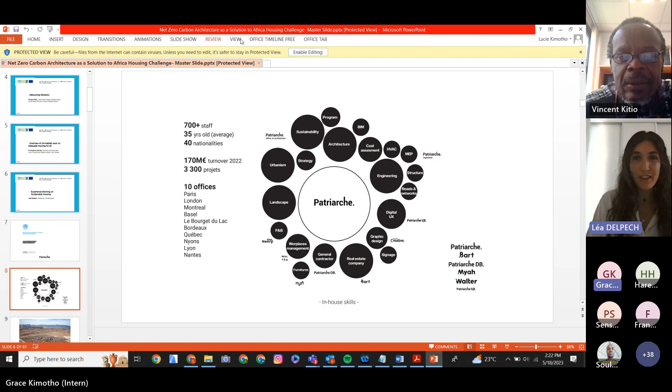So first we can present ourselves. I don't have the hand on the presentation. I don't know, or you want to share yours? I cannot do it myself right now. Grace, can you just, either you change it, or... I don't know how to do that. Okay, I can share your slides here. Okay, no problem, and I can just tell you when to change.

Thank you. So just to present ourselves: Patriarche is a family name, a family business for like 4 generations. We have Damien Patriarche today as general director, and we work through what we call augmented architecture, with very multidisciplinary skills within the office. The idea is to reconsider the whole building environment, having all the professionals within the office and making the best of each other to provide the best building possible. We have today 700 people in the office, divided into 10 different offices. Half are in France, and we have 2 offices in Canada, 2 in Switzerland, and 1 in London.

We have all kinds of professions within the office, going from engineering to architecture, also working on the real estate part. We have designed some buildings that we also manage today as workplace management, and this makes us able to change the way of using the building and provide new solutions.

Talking today about sustainable architecture, we have to consider that we're going to talk about architecture, so we'll not talk about the urban scale, but we always have to keep it in mind. About urban planning, there are the UN Habitat goals, good to always keep in mind when talking about the urban scale, on well-planned cities that are well governed and efficient. When we talk about the location of cities, sometimes we see development going a bit out of town, with satellite cities or this kind of thing. So these are all crucial things to consider for growing and building cities.

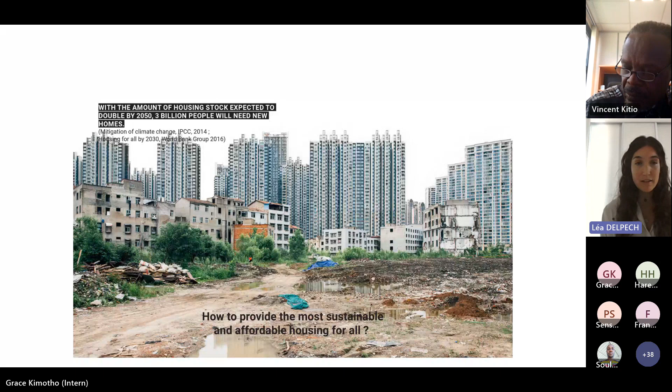So we talk here about the mass, the huge quantity of housing to provide, because we know that in the very near future, around 2050, we have more than 3 billion people to provide housing for. So we're talking about a huge mass and great emergency, because we have to provide very rapid solutions, all while reconsidering affordability. The question we ask ourselves today is: which sustainable and affordable building can we provide to answer these three needs of quantity, rapidity, and affordability?

When we talk about sustainability, of course we're going to talk about energy and the conception of the building. The more efficient the building, the less energy we need, but it also depends on the users—we really believe in a user-centric approach. It's only when energy needs go down and building efficiency goes up that we can provide a sustainable building. So it's a leverage of these two topics to work on to provide sustainable building.

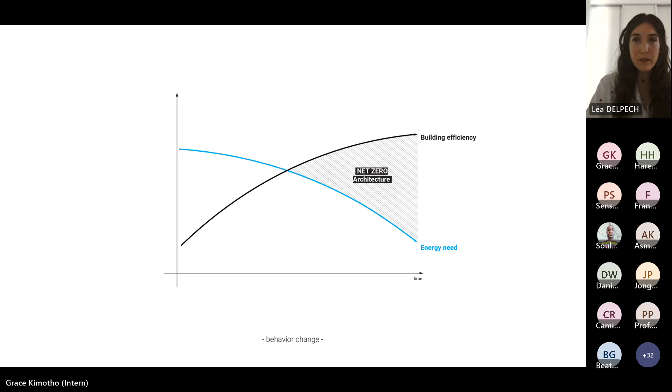So when we talk about sustainable building, if we talk about the African Housing Challenge, we cannot avoid talking about affordability. Here we consider two ways: there is a low-income class and this huge informal economy including a billion people, and another part, the middle and upper class. For the middle and upper class, we talk more about modifying the image of contemporary architecture and people's expectations in the production of housing, so it's about modifying the way we already produce housing. For the low-income class, it's more about providing a new way of conception that answers the urgent need for mass-productive affordable housing.

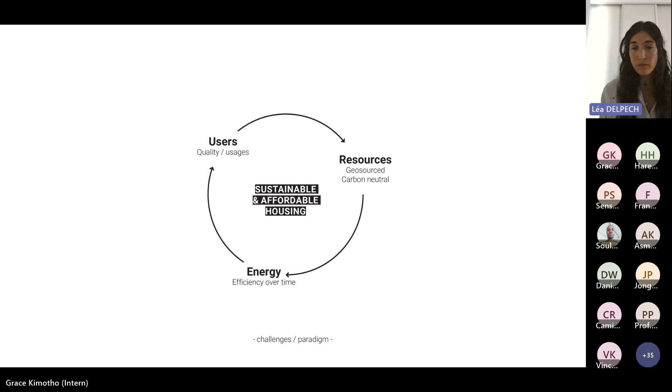So these are two ways of working with the same goals, talking about sustainability. As I mentioned, we include affordability and also livability, considering the users within the process of making architecture. From these points we get three large topics: the user-centric approach, providing quality of living and considering energy consumption within the building, and thinking of the long-term use of the building with the users' evolution within it. And of course, the resources, providing geo or bio materials within the building, always trying to lower the carbon impact of construction, and providing new schemas for large-scale, fast prefab creation.

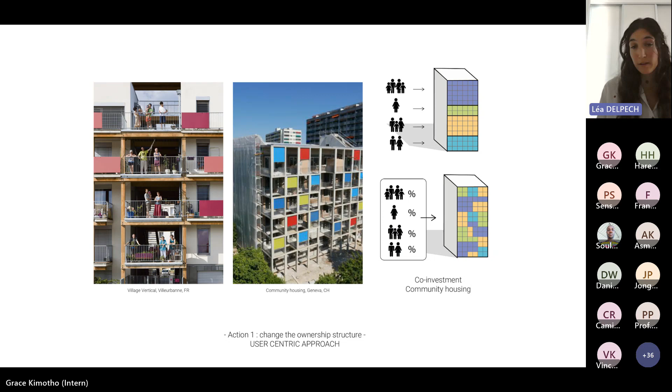Another approach is to consider adaptability within the architecture with a capable volume, for example, where an owner buys a volume that can adapt to his way of living in the future. So if we have a high volume, we can add a mezzanine or even add rooms depending on the people living there, depending on the moment of life, etc. So it's within the module that we have the evolution, and this also brings lower costs for the evolution of the building and retrofitting. So this is the approach on the volume.

Here we have the same approach but more on the floor plan, depending on the use of the house during the moment of the day, for example, thinking of a more movable way of using the house during the day. So we consider it long-term on the volume, and maybe more about daily life on the floor plan. All this brings new approaches to living that can offer new solutions.

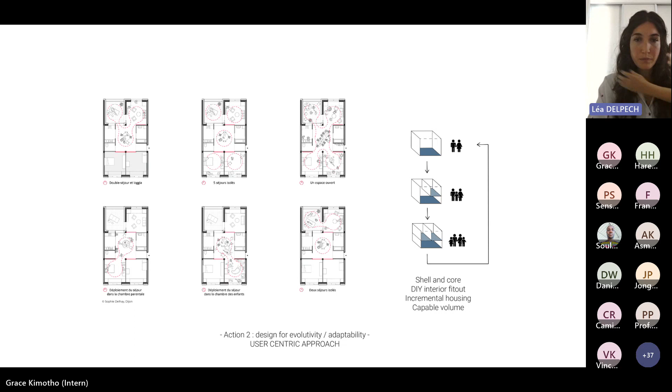Sorry for that. It's a holiday today in France, so we are all home with Thibaut and there can be kids around. I'm sorry, Léo.

So here's a project with bio and geo sourced materials that we developed in Togo a few years ago - this is a kind of good example we made. We have worked more than 20 years in Africa up to now, and in this project we used some very interesting processes to make the building. For example, we used the soil from the ground to make round bricks for the building, with a training process for the people who worked on it, providing them a profession they could use afterward to build other village buildings. The building was very large in scale, so we built a machine to make the bricks. This is the right approach to resources for making buildings.

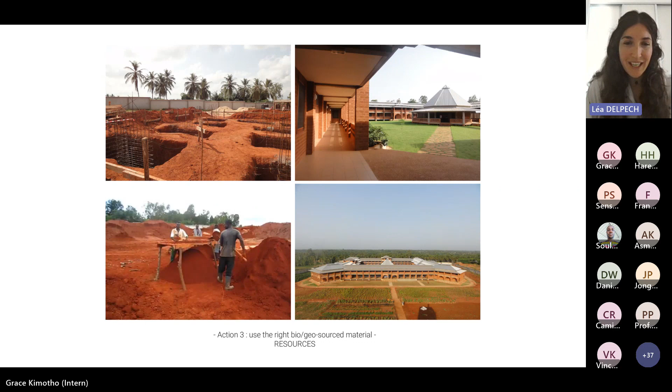We can go ahead. Here's another project where, considering the resources, it's about mixing the materials and finding the most affordable solution by mixing the materials and using the best of each for cutting the cost and bringing the best structure for each material. We can find some mixing of materials in the structure, etc.

We have made some other projects with, for example, this one where we used some prefabrication solutions. This was a project of a shelter for homeless, where we made the modules off-site and brought them with a crane onto the site. We had a structure considering the building, the modules to put in. So it's a way of prefabrication, and we are reconsidering it also in some other way, maybe on the facade solutions that might be more affordable for some other places.

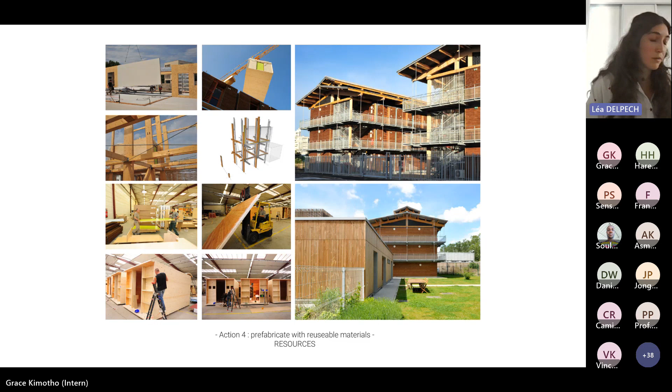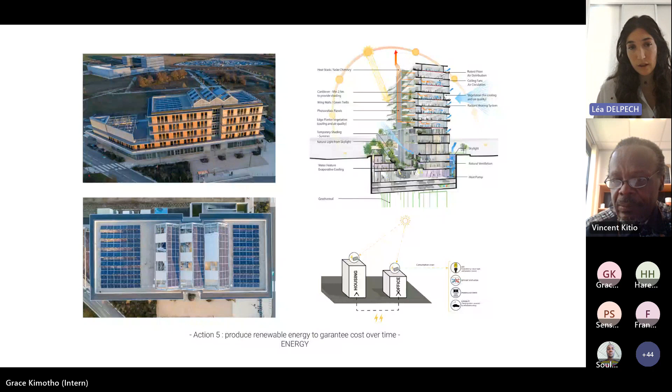Talking about energy for sustainable and affordable housing, we consider that the more we go off-grid, the more we can be efficient. For example, if we consider energy as a service within the building and include it from the conception of the building, we can provide the energy through the building. If we consider the whole chain from the beginning, even exchanging depending on the use of the building—like this drawing shows, going from housing to offices depending on the use—using the energy when we need it and providing it on our sites can also cut the cost for the users and for the people who live in.

This is not always easy to make, because for example the retrofitting takes a lot of money and effort, and sometimes bringing the users out of the building, etc. So this is not always too easy to implement, and this is the barrier we are watching today, with buildings which end up with no retrofitting, etc.

So our thoughts are to reconsider all this diagram and to make it leaner by dividing the cost on each step. So we can go on to the other one, please.

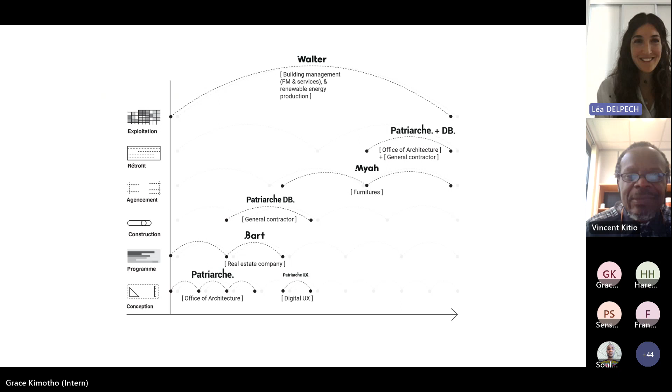You mentioned the fact that we should not just focus on providing housing for the low income section of society, but should also look into the middle and high income groups. This is very important, as you put in the presentation, talking about the fact that the user should always be the person we need to have in mind as we design, plan, and build houses for them. You also mentioned the issue related to densities, which is very important and needs to be taken into consideration as well.

If we think about the fact that urbanization is growing rapidly, and I like those pictures showing the sprawl. If we have to deliver houses just focusing on quantity, we might also damage the environment in the process. And when you were talking about affordability, one way is also to look into incrementality, that we give a space to the user, and then they can gradually improve on that space.

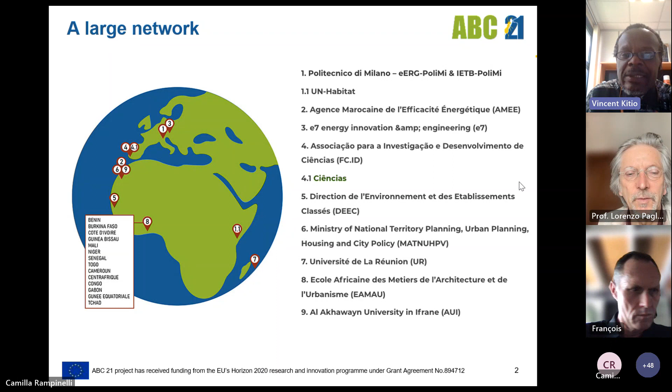Okay, so again, there are a number of reports that you will find on the website dealing with local materials and construction practices, case studies - Francois Garde will talk about that. Weather files for future climate, because we have to design for the future. Obviously we are designing now for the rest of the century and building now for the rest of the century. And an update of technical guidelines which exist in many forms - there is a review of existing books and good guidelines produced in the past, and some updates due to the new conditions. Let's go to the next slide.

There is also a lot of new advances - sorry, not too much, stop here. So there's been a lot of work to update and make more precise the energy assessment indicators and the comfort assessment indicators. I will focus on a few key elements of this, and in particular on the net zero energy over a year concept and its problems and possible solutions for those problems.

So the key indicator that we identify in the project, and is identified as a key indicator in the standards, is the energy need for heating or the energy need for cooling, which is the heat to be delivered to the space to be conditioned to maintain the intended space temperature conditions or comfort conditions for a certain time.

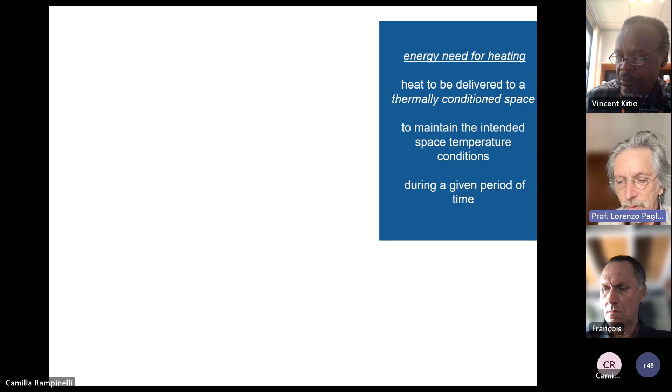This has to do only with the features of the building per se, of the building envelope and of the ventilation. It's independent of how we then produce and deliver energy to the building. It's how much the building uses per se for its geometric and physical features.

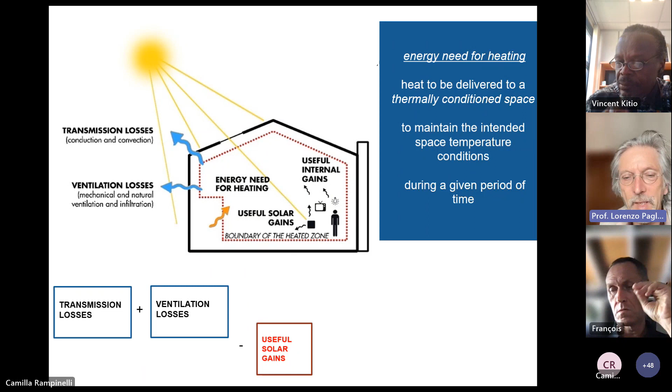If we go on, step by step in winter there are losses due to transmission through the envelope and losses through ventilation. We are sending out warm air and bringing in cold air. These are losses which can be compensated by free gains.

The solar gains and the gains generated by people and appliances inside - the difference between losses and free gains is what still needs to be given to the thermal zone to keep it at a given temperature. This is called energy need for heating, and it's physically defined in a univocal way, it can be calculated.

This is calculated generally in every labeling, because it's the first step for the calculation. Differently from this, delivered energy is the energy given to the larger boundary, which includes the building and the plants - it might be gas or electricity coming at the meter that we see here.

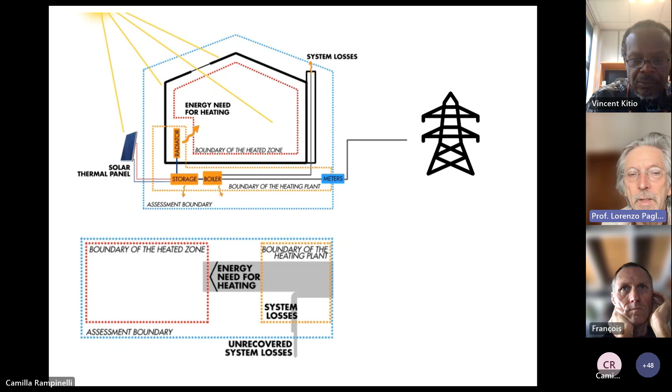If we go one step further, we see the delivered energy, which is the sum of the energy need plus the losses of the system. This delivered energy can come from local generation, a solar panel on the roof, or from the grid.

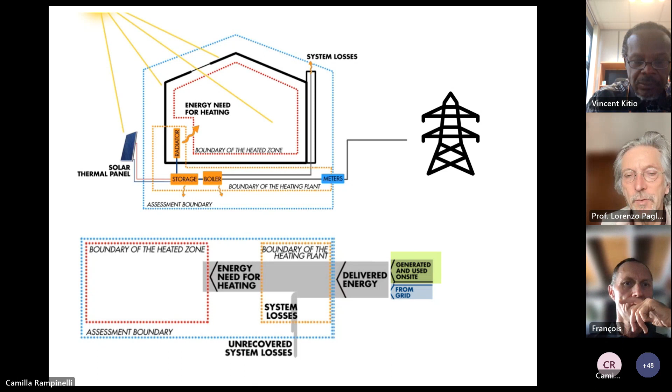If we go on, we can calculate to compare the various sources, renewable and non-renewable. We invented these primary energy factors, which take into account the losses between the point of delivery and the source. For example, gas - we extract it from a gas region, then we have to transport it, and unfortunately we lose some of it during the travel, and we have to pump the gas to proceed along the pipes, so we have energy losses which are taken into account in these primary energy factors.

When we consider all the flows coming to the building, both fossil and renewable, we multiply each flow by the primary energy factor. We call the sum of all these flows multiplied by the primary energy factor total primary energy.

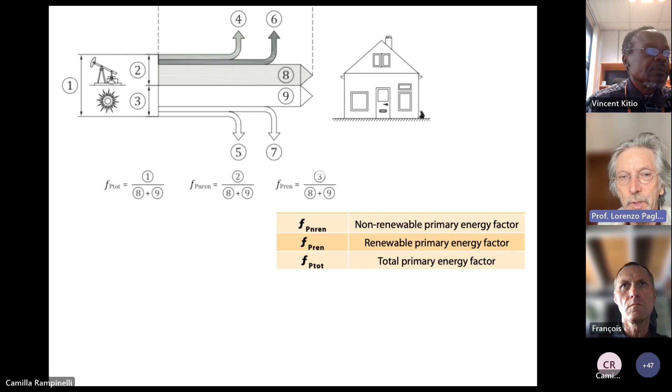If we consider only the non-renewable flows, one step forward, then we talk of non-renewable primary energy, because we consider only the non-renewable flows, the fossil for example. So we have these various indicators: energy needs, delivered energy, total primary, non-renewable primary.

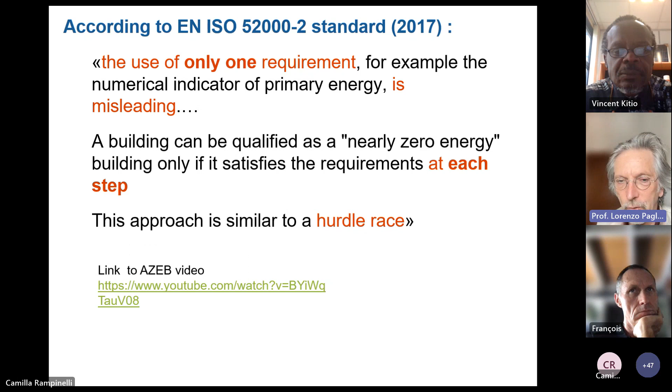The standard - sometimes in the labeling only one indicator is used, primary energy, sometimes not even saying which primary energy - and the standard clearly tells us that this is misleading. To really qualify a building as nearly zero energy, we should fulfill various steps. It's a sort of hurdle race with three steps to be followed. There's a video that you can watch where these things are described.

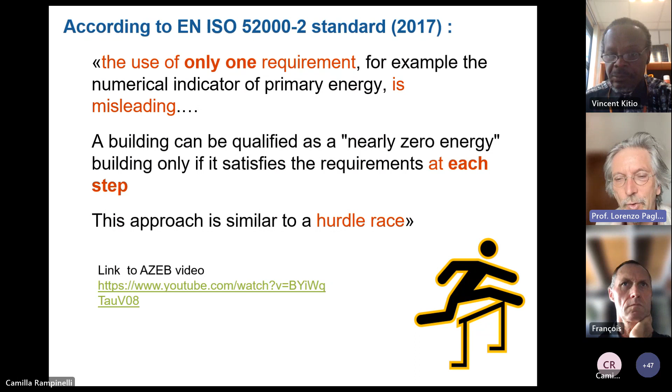These steps are: calculating and reducing the energy needs for heating and cooling, which have to do with the performance of the building envelope, its geometry, its heat recovery and ventilation. This is the largest step.

We have retrofits in Milano where we went from 150, 200 kilowatt hours per square meter per year energy needs to 20 - so we went down by 80, 90%. This is true also for new buildings, which can be done to a target of 15, 25 kilowatt hours per square meter per year.

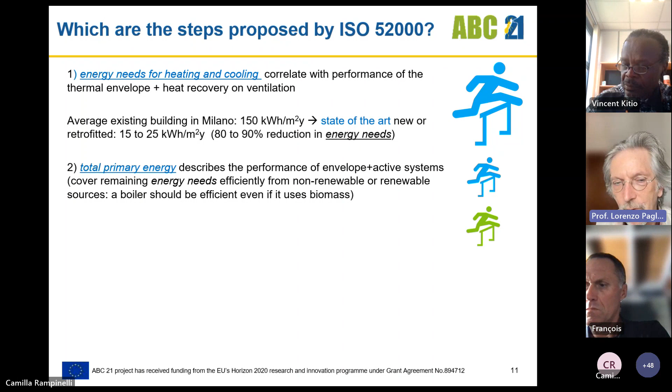Then we can reduce total primary energy by having efficient active systems to generate and transform energy to fulfill the energy needs. The last step is, within this generation, to choose generation from renewables, in such a way to reduce the non-renewable primary energy.

So the energy efficiency first principle, in fact, means lowering the indicators energy needs and total primary energy. As we see in many of the case studies that we've shown and will see later, the first step is the largest one, where we have more possibility for impact, going from 200 to 20 kilowatt hours per square meter per year energy needs if we design and build the envelope well.

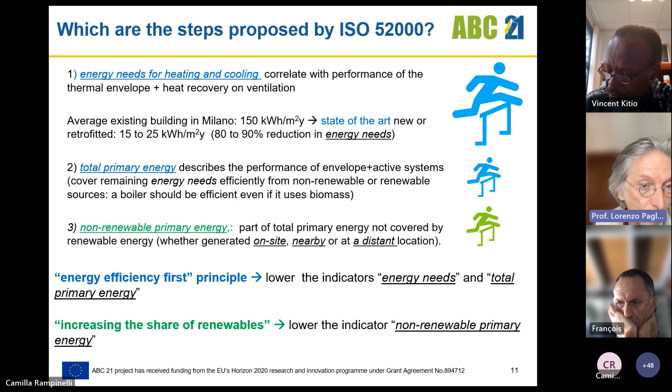And then the small amount of energy remaining should be generated from renewable sources, obviously. The fact that we talk of net zero energy balance, net zero buildings - let's say it's a sort of shortening, but it should include all three steps. If we just concentrate on the last step...

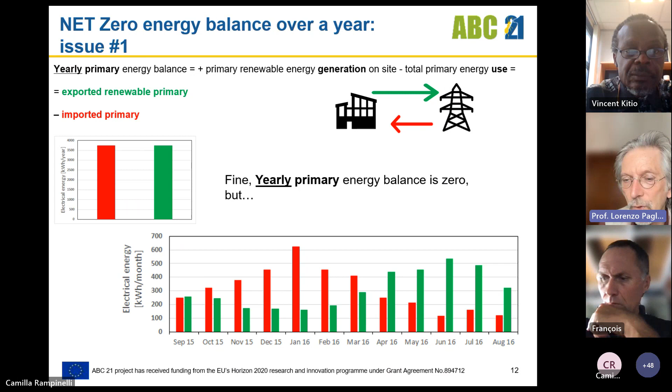The primary energy balance over a year can be calculated in this way: what we export, renewable energy exported to the grid, minus energy imported from the grid over a year. Over a year we might be at zero, so the two quantities might be equal, but month by month this would not be the case. Particularly in Europe, you would generate a lot in summer and use a lot of energy in winter to warm the house, and you will not have a physically zero balance.

Still, gas is burned and CO2 is emitted.

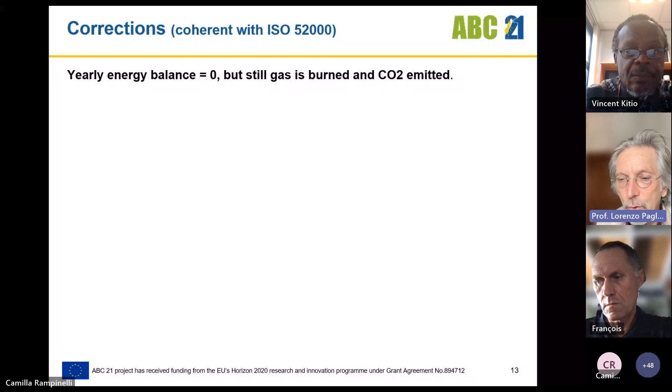In this balance, on paper, you assume that photovoltaic energy is stored in the grid and retrieved in summer and winter without losses. In reality, interseasonal storage costs materials and embodied energy, and incurs losses.

There are possibilities to correct this. For example, in Italy and other countries, the energy balance is calculated per month, not per year. Or the primary energy factors include these losses, as in passive house certification.

But the real physical cure to this problem is to strongly reduce the energy needs. In this way, the imbalance will be low, and the requirement for storage and transmission infrastructure will be low.

I think I can have one more slide.

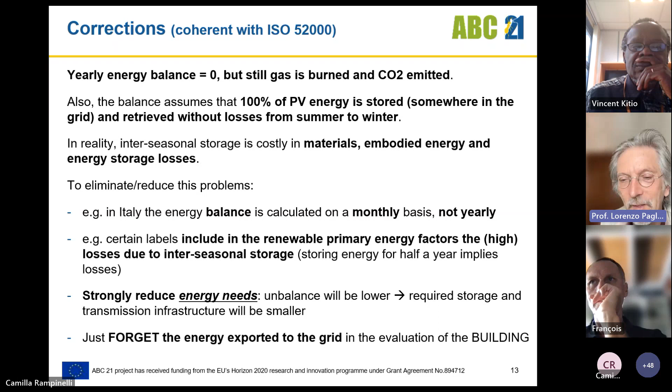In fact, there is a possibility in the standard to not consider the exported energy to the grid as something which improves the performance of the building. This is generation of energy in the energy system, something different from the building. You consider only the renewable energy self-consumed by the building in the qualification of the building.

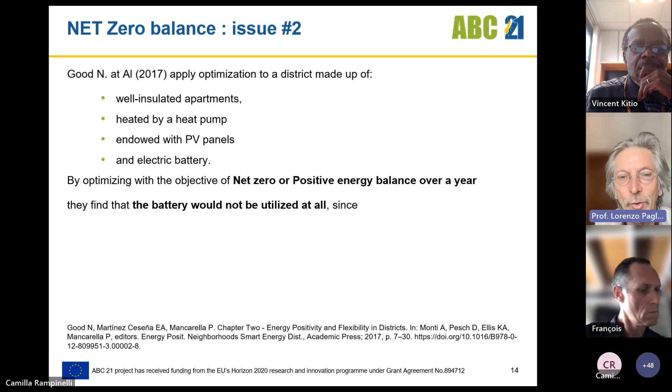Not doing this, and using this virtual balance over a year, means that when you optimize to bring this virtual balance to zero, even if you have local storage, you will not use it, because the virtual storage on the grid has no losses and is much better. So you are pushed to export rather than self-consume, which is obviously not physically reasonable.

So just a warning about this net zero concept and phrasing, which can be used if it's intended as three steps: reduce the energy needs, reduce the total primary energy, and then increase the share of renewable within the total primary energy.

I have also slides on comfort, but I guess Vincent will tell me we have limited time. So I invite you all to go to the website where there is the first webinar on energy and comfort definitions, and you will find in 20 minutes a description of these new indicators for comfort.

Which include, as a key element for summer comfort, air velocity on people. So the use of ceiling fans or natural ventilation to cool down the body via air velocity is now fully included as a key element in summer comfort in the new standards, which was not the case till five years ago. It was there, but just with a minor role.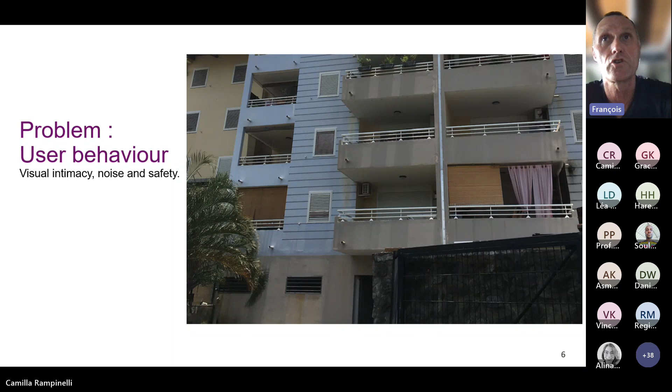We also have problems of intimacy, because architects sometimes don't think about intimacy, noise, and safety. On this slide, you can see that the tenants put up blinds, but the problem is that they completely block the ventilation, which is very useful to avoid air conditioning in our latitudes.

First of all, I'm here not to speak in terms of models. I will speak about rules of thumb, very simple passive solutions that are easy to duplicate.

First of all, the importance of trees. We have to plant trees around the buildings to create a canopy, a natural canopy that allows a kind of microclimate around the building, where the maximum external temperature remains at the top of the trees. The good example is at the top, and the bad example is in the middle of the slide.

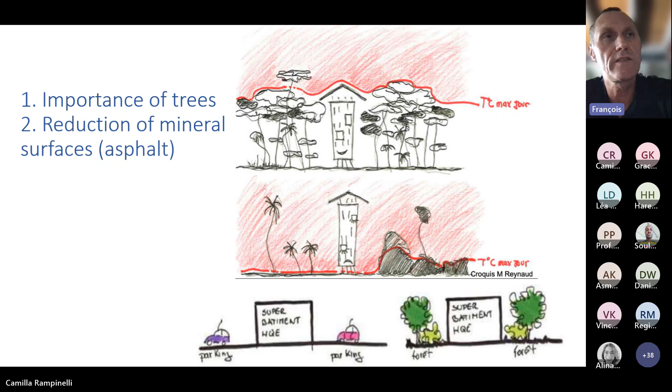The second thing: we have to reduce the mineral surfaces. You have to avoid putting car parks around the buildings. Another simple solution is to plant trees around the buildings and put car parks underneath the buildings. I will present now two case studies.

The importance of ventilation, very simple. We have different uses of ventilation for different things. In Europe, in air-conditioned or heated spaces, we use ventilation just to breathe, so we just have to renew the air, at a rate of 1 air change per hour.

The second use is to evacuate internal loads, but the third one is the most important. It allows us to create an air velocity on the users to minimize the temperature they feel, and we create this air velocity of 1 meter per second by using natural cross ventilation. In terms of air change rate per hour, that represents about 60 air changes per hour. If we can do that, we can feel comfortable at temperatures like 30 to 32 degrees.

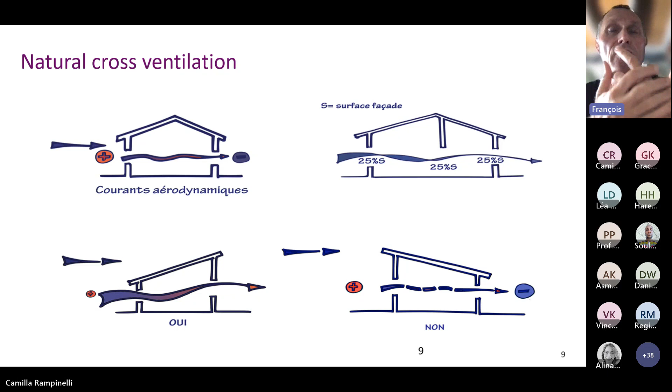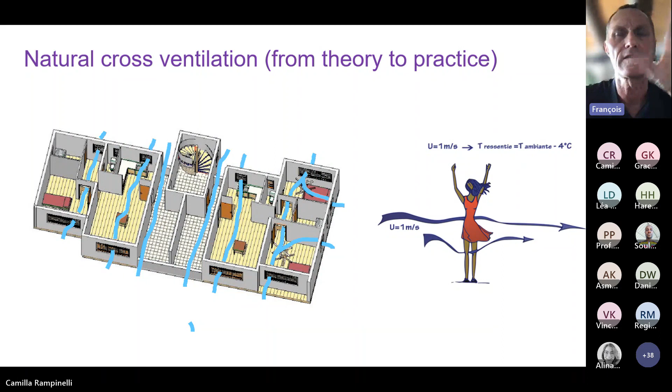Now we come from theory to practice. This is an example of two-bedroom units, and as you can see in the pictures, it's very easy: you have a stairway, and from the stairway you can access 2 dwellings, and all are naturally cross ventilated.

In all social housing dwellings, the installation of ceiling fans is mandatory in the regulations in La Réunion. That means 1 ceiling fan for each bedroom, at a rate of 1 ceiling fan per 10 square meters. It's very important because the use of ceiling fans can reproduce the velocity of 1 meter per second.

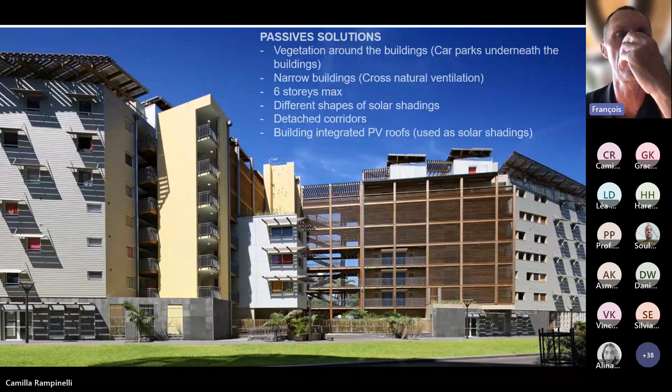The first case study is located in the city of Le Port, on the northwest of the island of La Réunion. This is one of the hottest cities in La Réunion. In terms of passive solutions, the architect has of course planned vegetation around the building. As you can see around the building, there are no cars; the cars are underneath the building. We have narrow buildings, 10 meters deep maximum.

Up to 6 stories maximum. We have different shapes of solar shadings, and we use low inertia materials for the corridors. The corridors are made of timber, wood, and they act to shade the main facade, which is made of concrete. We also have building-integrated PV roofs, which are used as solar shading as well.

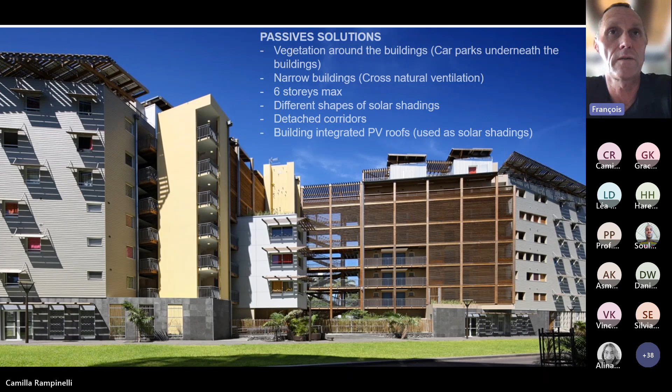So this is 2 pictures. On the left-hand side, you can see the corridors, low inertia outdoor walkways. And on the right picture, you can see vegetation around the buildings and still no cars.

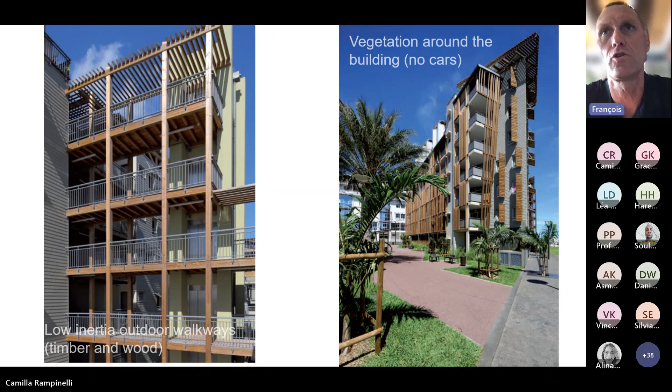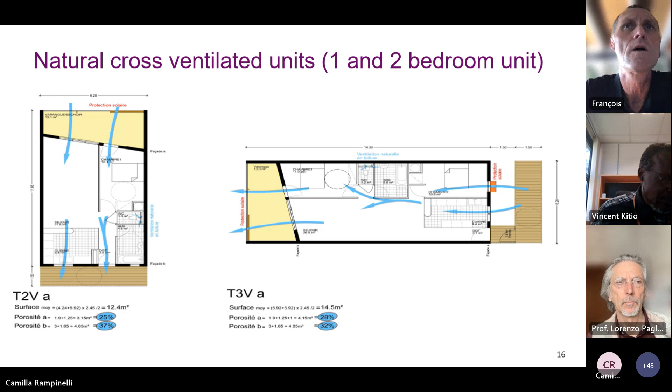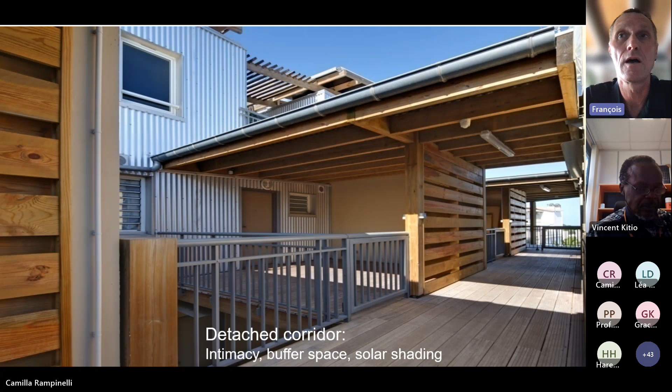Next slide, you have the plan view of 2 units, 1 and 2 bedroom. You can see on the slide that air can go through the units. One important passive solution is to use detached corridors to solve the problem of intimacy, and outdoor corridors act as buffer space. They reduce the inertia of the building, and we have very good feedback from users using this smart, simple and replicable architectural solution.

Another building project is the Îlet du Centre in Saint-Pierre. We have exactly the same principle. You can see on the aerial view that we have PV panels and solar thermal as well, and the cars are underneath the building.

Next slide, more pictures. The architects reproduced the native forest as it was before the first settlers came to La Réunion. In the middle we have a lot of native species, and it's really a forest that creates a fresh island effect.

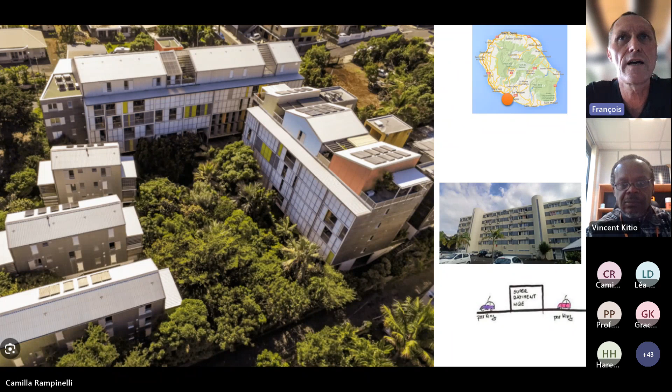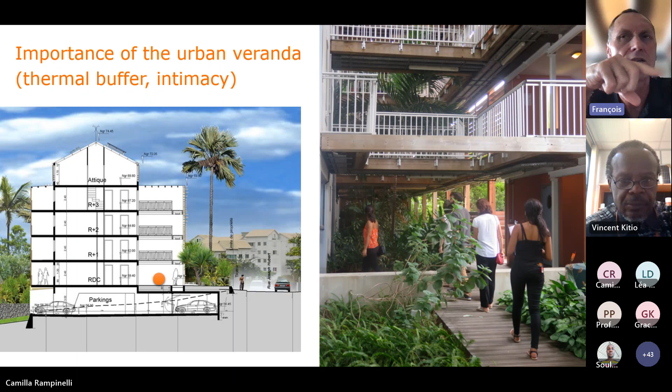Next slide, here you have a view of the urban veranda, which acts as a buffer space. It's all designed in wood with low inertia, and users enter their apartments using the private corridors. I think Vincent, you visited this project. In terms of comfort, it's remarkable.

Another view of this urban veranda. Next slide, here we monitored the different barriers.

Next slide, here you have the passive solution used for intimacy. The architect used vertical movable louvers.

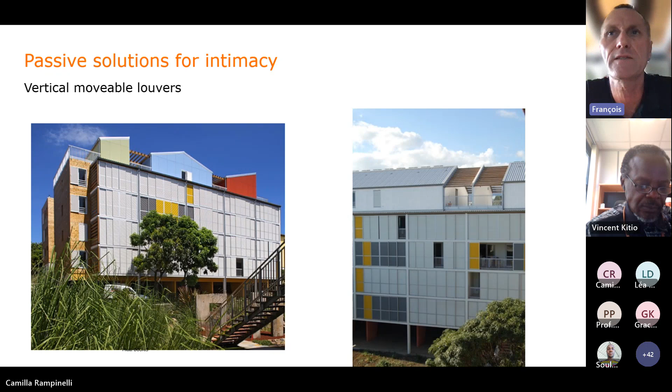Next slide, again we have a 3D view of a one-bedroom unit, which is naturally cross-ventilated.

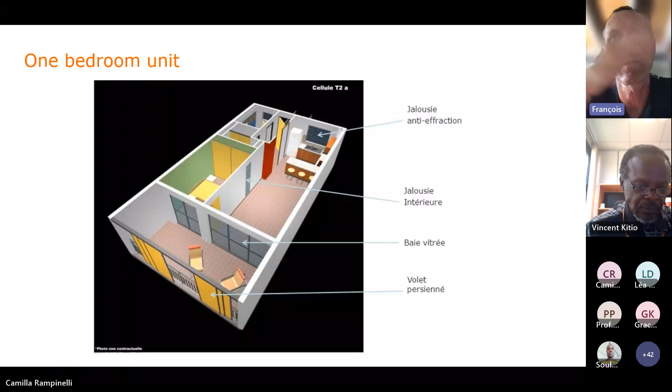Next slide. Renewables, of course, are used on the canopy of the buffer space. And this is my last slide.

So what solutions to design a very comfortable and affordable project in La Réunion? The project I presented is very easy to duplicate in Africa. First of all, vegetation and trees around the building, car parks underneath the building. Second, narrow buildings, 5-6 stories max. We can build very dense cities with 5-6 stories max. It's useless to design big towers like Leah showed, because you lose the connection with the ground, and you cannot use the expertise of local companies to build 40-story towers.

Detached corridors with low inertia materials is a very efficient solution. Of course, we have to shade the openings. We have to use natural cross ventilation with large openings, 25% porosity. Ceiling fans must be installed systematically, and it works in terms of social and economic impacts. Thank you very much.

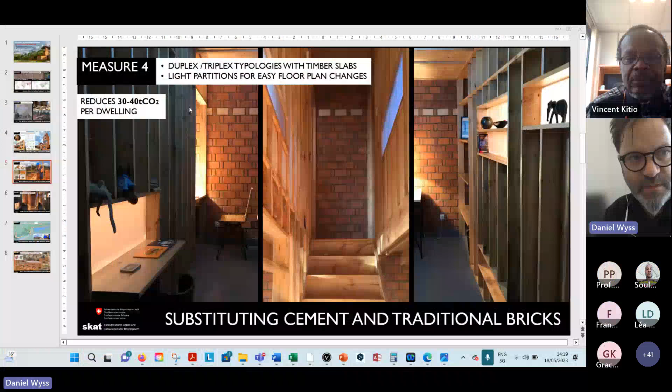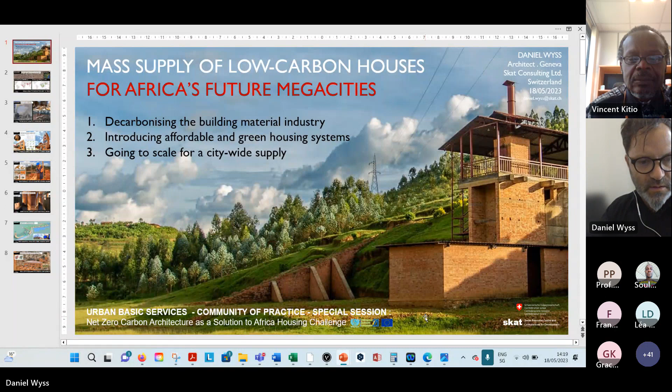Maybe Vincent, can you go to the slides, or shall I share the screen? What is the preference? I can also share my screen if you want. Maybe you share the screen so it's easy for you to operate. Can you see my screen? Yes. Okay, let me share. Here we are.

As I mentioned, I will present a project of the Swiss Cooperation Agency, located in the Great Lakes region, covering Rwanda, Burundi, and East Congo. Regarding the objectives, our task is decarbonization of the building material industry, introduction of affordable houses, and most importantly, developing solutions to go to scale for citywide or even countrywide applications.

My second slide shows the challenges in terms of quantity we are talking about. On the bottom left, you see the absolute numbers of urban growth of large cities all over the world, and you can see that beside India, Africa is the main urban development hotspot, in terms of quantities, with the most new houses to be built.

We are talking about 25 million additional people every year in African cities, so this is substantial, and is one of the big challenges in urban development worldwide. Most of you know the shift of large cities from Asia to Africa will take place in the coming generations, so towards the end of the century we will have 13 of the 20 largest cities on the African continent, with the biggest counting more than 80 million inhabitants, like Lagos, Kinshasa, Dar es Salaam.

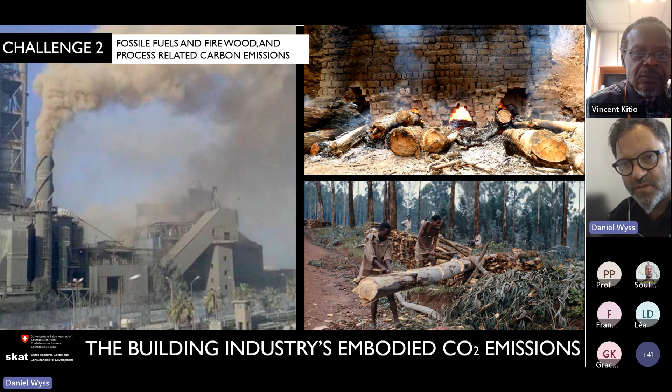Accordingly, our first work was to introduce low carbon or nearly carbon neutral brick making technologies. This was possible through technologies that allow a swap of fuel - instead of fossil fuels or trees, our technologies, which we didn't invent ourselves but identified and transferred, use bio-waste: what's coming from agriculture and wood processing, so sawdust, coffee husk, and so on. With this, we managed to make a quite strong building material that allows for storied construction with a minimum of concrete.

We have developed a modular housing system, based on a cube, as Vincent has mentioned. We are currently building such a cube at the UN compound in Nairobi - it can be visited in a few weeks. With this, one can freely combine units into large urban buildings from 2 to 5 floors. It has a free plan, so inside every homeowner can shape and subdivide space as they want according to their needs, and it can easily be modified over time, which is very relevant in fast-growing cities.

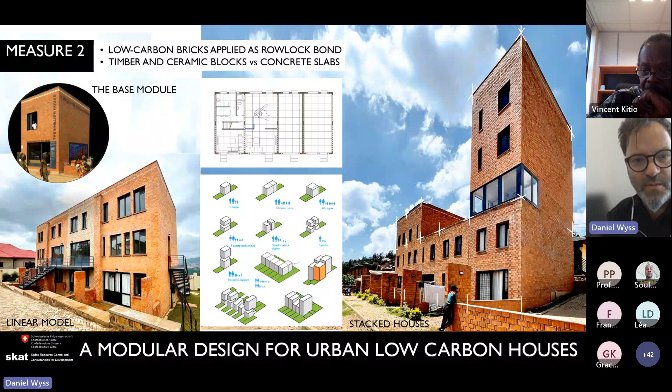These are just some examples, from the presentation we gave in 2017. Very rapidly, within less than 2 years, we had 2,000 copies of those units built. So it became more popular than we actually expected. Here's some insight into it.

The building system is based on fired bricks, but we use a cavity wall system called rat-trap bond, which was developed in the early industrialization period and then a bit forgotten. We reintroduced it - it can be reinforced with concrete and easily carry 3 floors, and it significantly reduces the quantity of mortar and bricks needed for construction.

Another key element we introduced are timber floors. A lot of the construction costs for storied buildings go into the concrete slab. By introducing duplex and triplex buildings instead of horizontal apartments, we could introduce timber floors that not only reduce costs but also reduce CO2 emissions, and even store CO2. For partitioning walls, we also introduced light timber frame walls that can be shifted easily once a family's needs change over time.

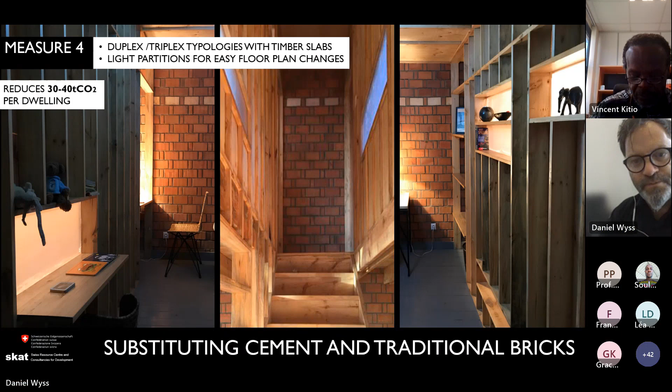So in order to supply the hundreds of dwelling units required every day to follow the pace of growth of these cities, we looked at how to organize the industry so they can supply the quantity required. We are currently establishing an eco park for low carbon building material production in Kigali.

This is an illustration of it. It brings together a variety of different producers, manufacturers of different material that all need to meet the lowest possible standards on CO2 emission. The plan is that these industry clusters supply entire buildings. They will be erected and built in situ, but that complete package of low carbon material can be delivered, along with pre-engineered drawings that reduce planning costs. These are like the muscle for the supply of low carbon houses.

We are still a bit at the beginning. We have models of the factories, we have tested them, we have optimized them, and are bringing them together into an organized unit. This is something that will take place in the next 2 years, and we will keep you informed about this progress.

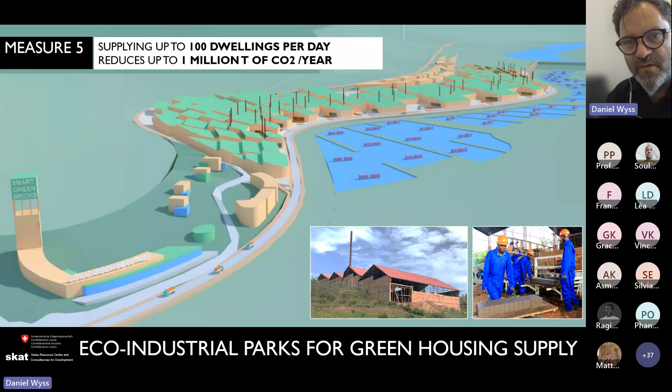We hope this could be a model applied in many African cities. We are already in touch with a number of East African authorities foreseeing to establish similar structures for the supply of their houses. But supply alone will not guarantee that the respective building principles will be applied where it is most needed, so we also work on urban transformation methods for informal settlements.

You can see here our pilot building in Kigali, where we allow the local population, the inhabitants, to replace their houses with urban dwellings which they can shape and organize the way they like, with participatory methods, and also to accommodate additional families in order to densify the neighborhood and create public space and green space that make these neighborhoods more livable.

This is the package on which we are working. We have been doing this for about 10 years, and right now we are working on methods to avail the knowledge and expertise generated with all our partners across the continent. We are in touch with UN Habitat for that, to see to what degree a community of practice like yours, like this platform or others, can actually access this generated knowledge.

Thank you very much, Daniel, for this presentation, and particularly for reintroducing the bricks, which we could call back to basics. We know that one burnt brick can last more than 200-300 years, and if we embed that, we have low carbon architecture. We use it to produce low carbon building material, and it will definitely help in advancing the fight against climate change.

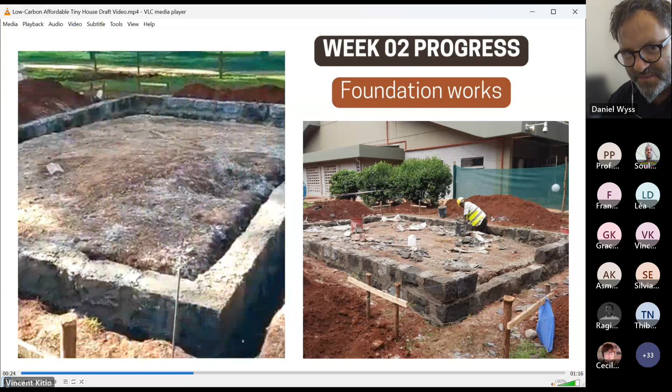Just to mention, we are bringing this technology also to Zimbabwe and to Harare. We have already secured some resources, but for those attending our Habitat General Assembly, we are building a demo house, which I'm happy to share with you now. I'll invite our UN Habitat colleague to pass by. It's just near the print shop; we were given this space so that we can demonstrate that this project is possible.

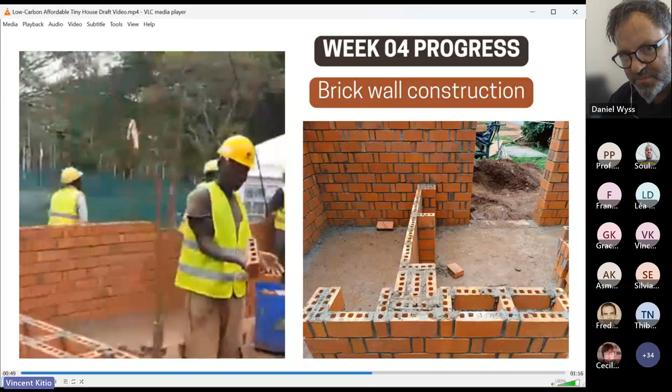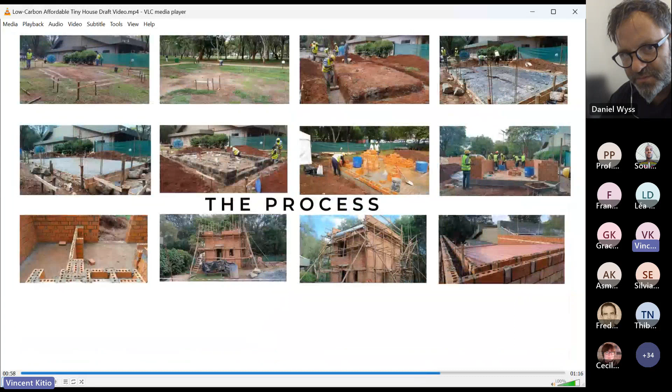One advantage, perhaps not really mentioned here, is that this is highly labor intensive, and also that these bricks are burned using waste material, which in some cases is otherwise just burned away. So why not use it for something useful? This building will be self-sufficient in energy. It will also show that with fewer resources, we are able to help African governments that want to produce more houses, and that this technology is possible. That is why we are implementing and showcasing it here.

Now I will move to the next presenter since we are slightly running out of time.

Professor Blaise Mumpo, I don't know whether you are... Blaise, are you? Can you share your presentation? Blaise or Albert? Yes, Albert? Yes, thank you, Mr. Vincent. Dr. Blaise is sorry to be absent today because he has another mission, so I will present in his place. Okay, thank you very much.

Just a short introduction. We have seen different example practices, and we also heard about the theory behind it. We wanted, during this webinar session, to also see what tools exist out there that can be used to design net zero or carbon neutral architecture. There is an association of research that has been training building practitioners in using this tool, which can help them achieve the performance we have seen, and also inform the designer for better selection of strategies and materials.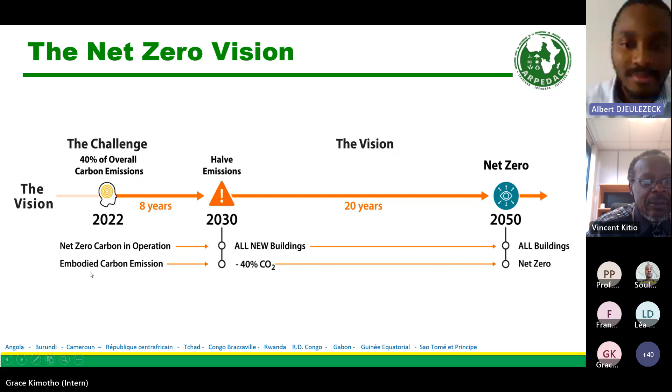Thank you. When we see the challenges and opportunities in Africa, we have 1.6 billion people living in substandard conditions in Africa, and half of the buildings needed by 2050 are not built yet. That means architects and actors of building construction have a lot of work to do and a lot of opportunity to get. By 2050, the number of urban domestic dwellings could triple from 400 million to 1.26 billion.

That means we have to build housing for these people that will come by 2050. An estimated 75% of the housing stock that will exist in developing countries in 2050 remains to be built. As we can see, we have a lot of buildings that do not exist yet, and we have to be capable of good construction, because we are facing climate change, and we must build in a sustainable way, not again unsustainable constructions.

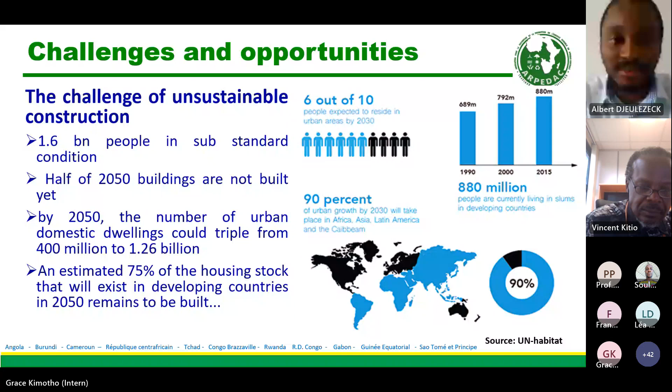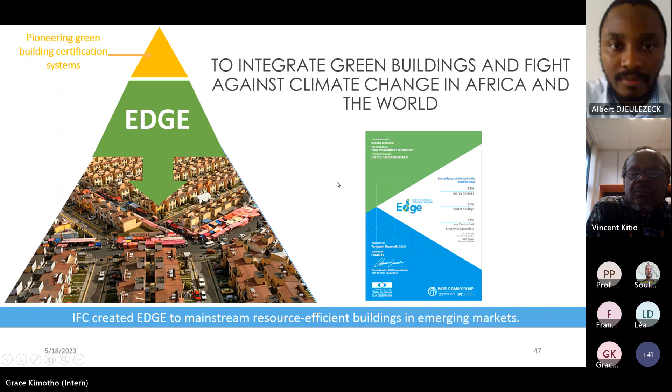Next slide, please. Albert, I will just suggest that you just speak because we are running out of time, and just explain how EDGE works, and what you are offering, so that we can move fast to the next presenter. Please go ahead and also summarize.

Okay. So normally we have that EDGE is a tool that can measure your energy, water, and embodied energy. With this tool, you can know if you have done some savings in materials, energy, and water, and so with that, we've lowered the operational cost of construction of your buildings.

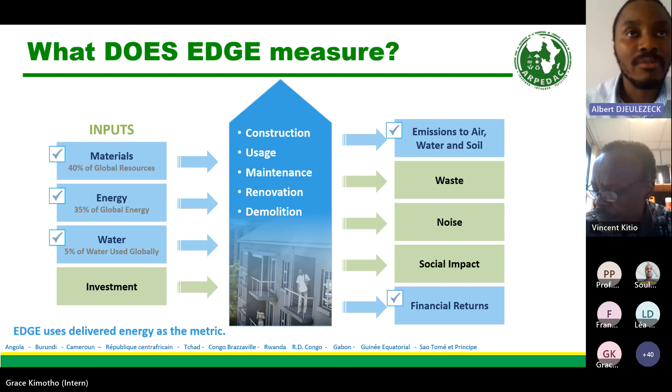And with EDGE, you can also calculate the emission gas for a year, as well as return on investment on the green element. EDGE is a tool that works across all building sectors. We can work with EDGE in new buildings, existing buildings, or with refurbishment.

EDGE works from homes, hospitality, retail, offices, hospital, and EDGE is made of 3 components: the software, the green building standard, and the certification scheme. About the software, it is free, so architects or anyone that wants to work with it can use it, and even if you don't want a certification, you can design your building in a way that will be green with the standard of the IFC.

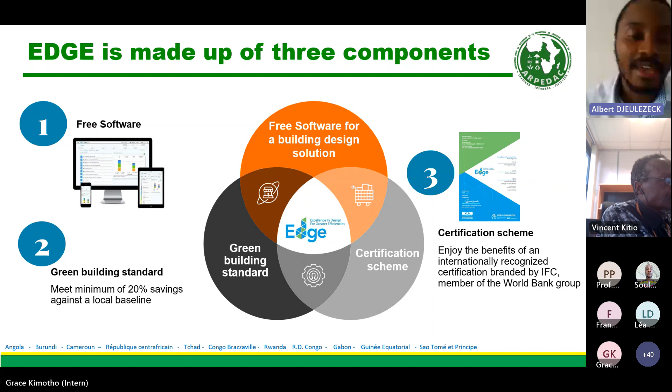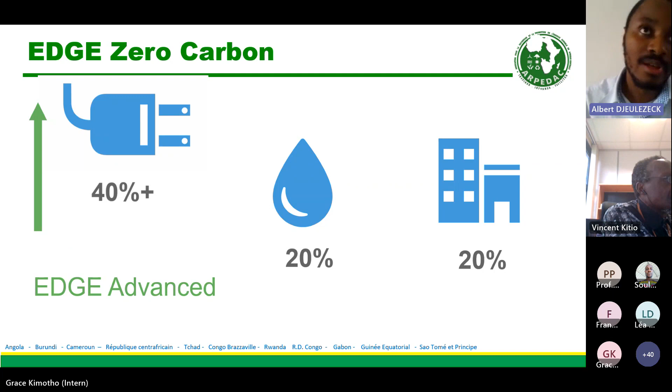About the achievement of zero carbon, EDGE requires the building to achieve a 40% saving in energy, at least 20% in water and in embodied energy. After you have achieved 40% of your savings in energy, you must demonstrate that you have 100% operational energy that will be ensured or supplied by renewable energy, on-site or off-site. Another solution to achieve zero carbon with EDGE is to have a credit carbon that corresponds to your 100% energy use by year.

What is the advantage of EDGE is that when you look at the parameters that banks have to finance a project, we can see that EDGE corresponds to each criteria that this bank or this group has to finance a green project. So with the EDGE tool, you can directly have green finance.

But in construction, we have some problems because most architects, most actors, do not have the capacity to design environmentally and achieve zero carbon. So a barrier that we have seen is technical and education. That is why we need to raise awareness and educate people about EDGE that they can use, and we support building capacity through ARPEDAC to promote the transition towards a zero emission and resilient built environment in African countries, by raising awareness among stakeholders, communicating key messages and insight to regional stakeholders and beyond, as well as disseminating promising education and training initiatives and identifying any gaps that need addressing.

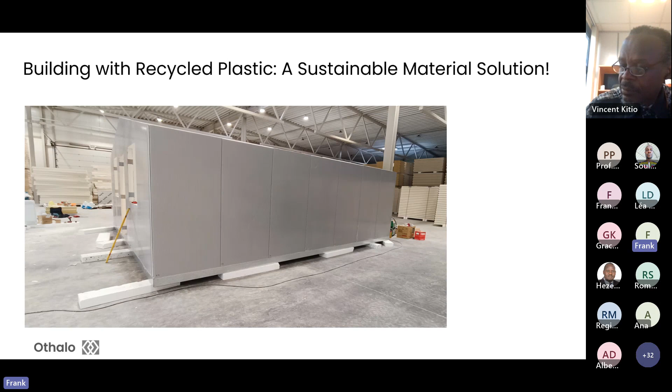This is the one that's been erected in Nairobi. And this is where the idea of Othalo is: using one global problem, the plastic waste, to solve another global problem, the housing deficiency, and to make it adequate, affordable, and easy to build. I'm going to tell a bit more about that as we proceed, and I'll be quick since we're running out of time.

Several of you guys, especially Professor Lorenzo and Francois, mentioned this: designing according to the climate zone. This is something Vincent has imprinted in me since we first met — how to use the environment around us to make sure the housing runs as sustainably as possible. Our designs use natural ventilation, courtyards, passive heating and cooling systems, cross ventilation, and our materials have low U value.

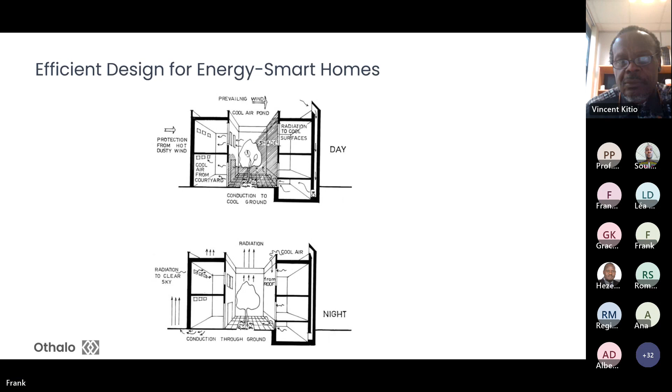It's not only about the housing itself. It's not about building a shelter, a roof for one's head — that's one thing. It's about creating communities for the future. This is what we are thinking about, one of the bases we are working on. We are going to use the Othalo houses as platforms for producing, conserving, and distributing energy. But this is the next step in our evolution, and maybe we will cooperate on several levels here.

Transforming lives — the Othalo social impact and community empowerment. This is what we're talking about: creating, using plastic waste as a raw material to build homes, to give work to a local workforce, because we're using local plastic waste to produce housing systems on an industrial level, which allows us to employ the local workforce and together build communities. It's all about creating more than a building — communities and a future for the next generation. This is what we are really focusing on. Housing, we see housing as a tool to do that.

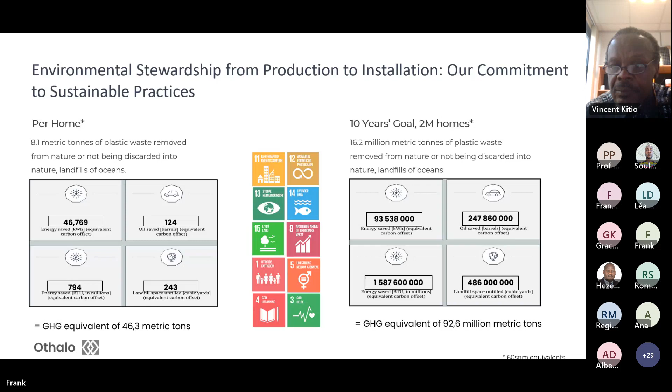This is how we see the world, but this is really important for us—we are not doing this ourselves. We have said that Othalo is not us, not us from Norway. It is what we do together. We need local partnerships, governmental partnerships, local empowerment—we need the locals to want to join us, from picking plastic, to recycling, to producing and erecting the houses. That is what we are really looking at. It is not a company; Othalo is meant to be an idea where we can actually create a net zero world together.

So that is what I wanted to say, kept short. You will see more about the housing in Nairobi, meant to show the recycling of plastic, the reuse of the modules—we have a cradle-to-cradle solution where we can perpetually recycle and reuse the modules and elements to keep the carbon out of the environment and the plastic out of the environment. That's what I wanted to tell today during this call. If there are any questions, I'd be happy to answer. Thank you very much.

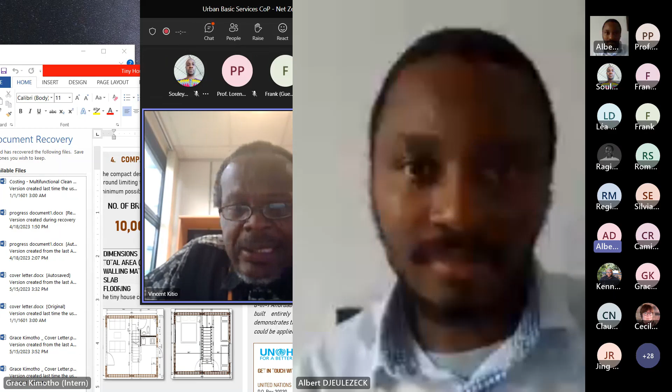As I said, we measure the energy needs and the embodied energy, the primary energy for the extraction, transportation, and transformation of the building envelope. If I can share my screen, I can show you a brief. Maybe, given that we have a lot of colleagues leaving for other meetings, we can just communicate with Lorenzo directly and explain to him. Anyway, if it's something that can take less than a minute, please go ahead. Okay.

Yeah, Albert, we are waiting for you. Can you see the screen? Not yet. Probably arriving slowly, the changes, it's a matter of internet communication. Let me try again, please. Is it okay now? I think the internet is slow. Anyway, just explain and we'll continue.

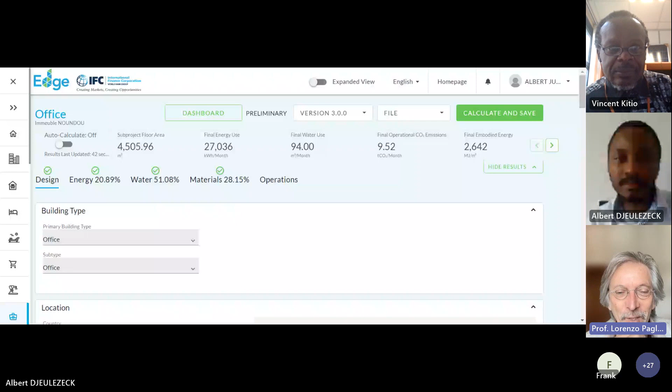Just a comment again on the language, because that will help us maybe in further communication later on, which hopefully will continue as facilitated by UN Habitat. Here it says final energy, which is sometimes another word for delivered energy, the energy measured at the meter, the gas, the electricity. While the energy need is really different.

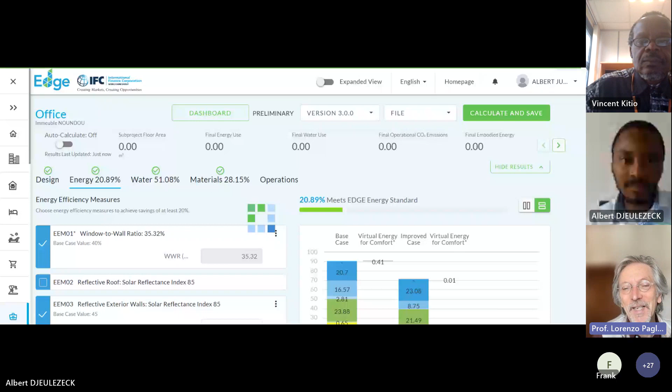So my suggestion everywhere, not just in this case, is, even continuing to use our own language, it would be very useful to have a translation table from the language used in, for example, this simulation tool or another analysis, to the language of the standards, the EN ISO 52000. So then we can easily compare our case studies in ABC21 and the results of EDGE or of Energy Plus, which uses another language yet. This could be one of the small but important steps we can do together going forward.

I don't think we can do it now. Thank you very much, Professor Lorenzo. Thank you very much, Mr. Albert, for the presentation.

I just wanted, in concluding this very interesting sharing of community of practices, to say that we have invited Shelter Afrique, which is one of the leading agencies promoting mass housing in Africa, but unfortunately they were not able to come. We wanted to hear what they are planning, but most of the issues they mentioned were about the need for housing, and that financing should not be an issue, that the resources are also there. We have also invited someone from the ministry to talk about the building code, and we were informed that the new building code in Kenya includes energy efficiency measures and minimum compliance requirements for energy use in buildings.

So basically, I can conclude this special session by saying that we have the politicians with us, the policy is there. We have the financiers that are also transitioning towards green finance, and therefore we'll be seeing more and more green mortgages being established. We also know the knowledge exists, we have different tools and practices. This has been demonstrated. Most of the housing that we were talking about here, we have seen that they exist. In fact, even our offices here in Nairobi are a standing example of how to use energy efficiently in buildings and how to use renewable energy.